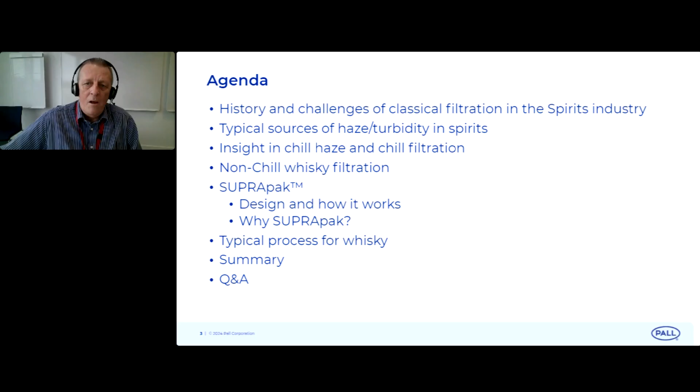First, I'd like to start off by asking just some polling questions, just so I can get a bit of an idea in my mind, with non-chill filtration. So this is filtration, for those of you not aware, is just standard filtration with no heat exchanger involved. So you are filtering at the ambient temperature of the room that you're in. If you could just please click on one of the answers, whether you're familiar, somewhat familiar, or if you're not familiar at all. Thank you.

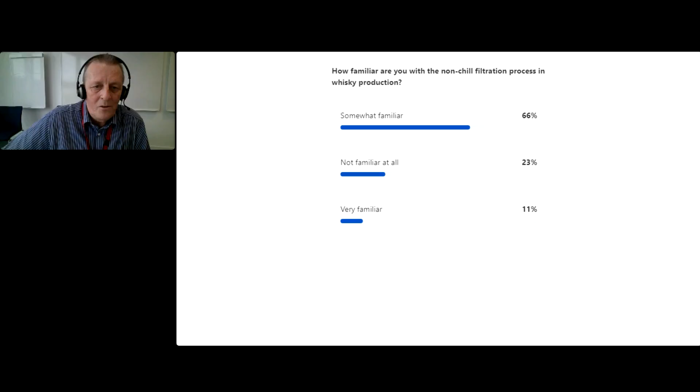And then I hope I've given enough time for everyone to answer there. But that's a fantastic response. It tells me exactly who it is that I'm talking to, and I appreciate your response.

So just to go over the history of spirits filtration, where we are - we go back as far as 1892 when we look at DE filtration, and this was traditional for really large batches. Then about 130 years ago, we moved on to what is now known today as filter sheet filtration. These filter sheets are still in existence today, and you're going to see how we've moved on from filter sheets already.

And then we moved on to lenticular filtration. In the Pall range, these are called the SUPRAdisc lenticular filters. It uses the same media as what you would use in a filter sheet, but you can use it for both large and small scale production.

I'm then going to introduce where we are now with the 4th generation, and that is called SUPRApak. SUPRApak is also sheet based, but it has a completely different filtration mechanism called edge flow, and that filtration, the SUPRApak range, is called modular filtration.

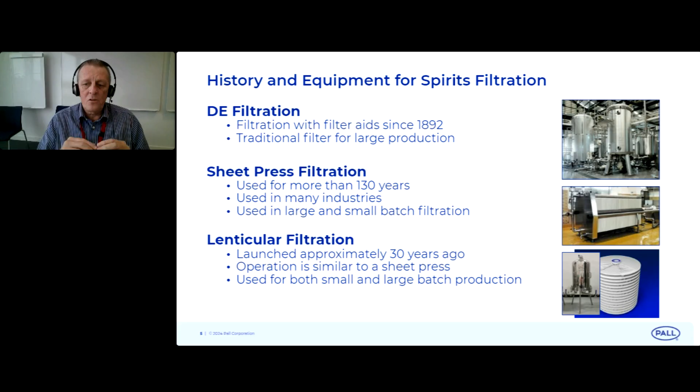So the challenges we're going to start with, because DE filtration doesn't exist, plate and frame filters do still exist. And what are the challenges that we're getting? Obviously, it's product loss. If we're talking about brown spirit filtration, you're talking about a very expensive product, so every liter of spirit that is lost in this process is costing a lot of money.

These filter presses, as you can see in the pictures, there's a lot of components to them, and these are high maintenance costs. These are old machinery, and also there's the labor cost involved in the filter changeouts, closing the filter, getting it ready, prepared for a production run.

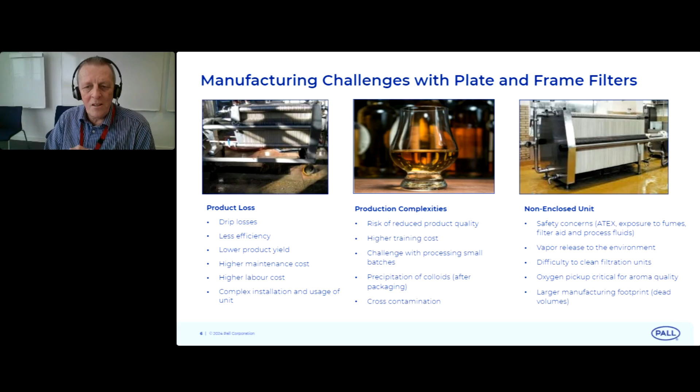Also there's a challenge with something like this. You're pretty much tied into large scale, or you're tied into small scale, one or the two. You really struggle to do both of these. With them not being fully enclosed, you've got the ATEX concerns, you've got the vapor releases into the environment, and you've also got these units can pick up, people will be walking past, touching them, and it's got a very large footprint.

So this is just a typical brown spirits process that I'm talking here, more or less, to the people who are not very familiar with the non-chill or even the chill filtered process. So of what you've got in...

processing brown spirits. The first part where Pall comes into the equation is when the casks or the tankers are unloaded into what's known as the dump trough or the disgorging trough, and these are usually then the pre-filters that are used before it goes through to blending.

Often we would recommend putting a filter before the heat exchanger, just so that no particles are going into the heat exchanger. Then you would have the typical filter press, lenticular, or the SUPRApak modular filters to remove the chill haze prior to bottling. You would have a guard filter as close as possible to the filling station.

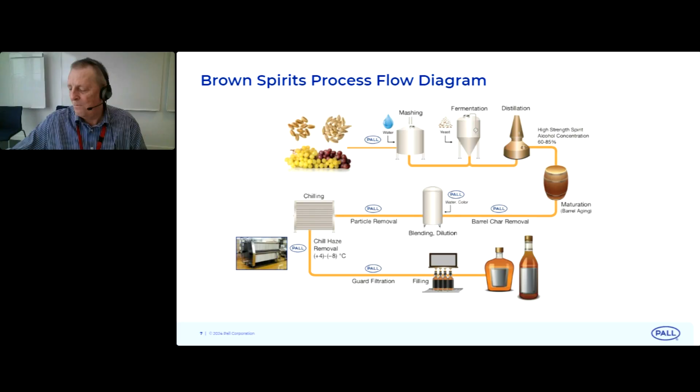We get haze in spirits, and what are the causes of haze? You will have particulate haze, and this is caused really by the mechanics of processing. It can also be caused by diluting with water. So there's quite a number of causes, you get your particulate hazes, and these can typically be quite easily removed with surface and depth filters.

So surface filtration would be your pre-filters, like a filter cartridge, around about, say, 40 microns. Some people go down to 10 microns. And you would also remove particles at the disgorging trough with a stainless steel mesh, 500 to 350 micron removal rating.

Then there's the colloidal haze. Now the colloidal haze, this is a lot of, from what we would say, the ingredients you would have from, say, citrus fruits. There would be parts left over from the previous distilling process, and these colloids are a lot more difficult to remove. You would remove these colloids with typical depth filter sheet media.

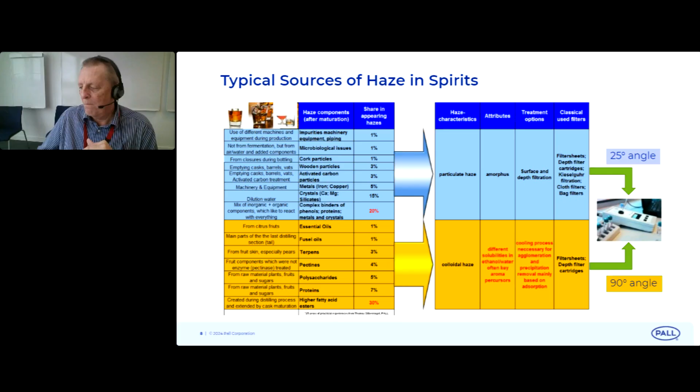Now the lipids, these are what creates chill haze. A typical example of what chill haze is: if you have a whiskey that has a number of lipids in it, just put a block of ice into a glass of whiskey and you will see that cloudiness form. So that is a very simple way of explaining what a lipid is.

And this affects, obviously, visually the spirit, which a lot of people don't like, but it also affects the aroma of the whiskey, and that is a problem, and it will affect the taste of the whiskey as well.

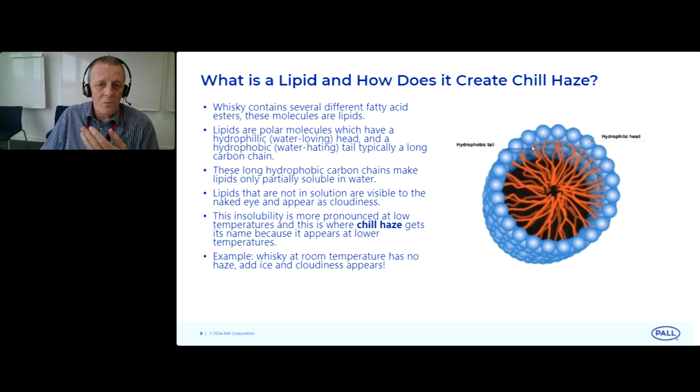Where do lipids come from? As you can see, a number of places. You'll get them right with the barley that's used, it will be during the fermentation, it will come during the distilling process, but also you're going to have the maturation process. As you can imagine, if you've got a very young whiskey, you shouldn't have that many lipids in there, and it should be a lot easier to process.

When you start going on to spirits which have been in the casks for a number of years, and also depending on the type of cask that's being used, a sherry cask for example, you will get a lot of lipids from that. But also, obviously, the longer that the spirit is maturing, the more chances the lipids have of growing as well.

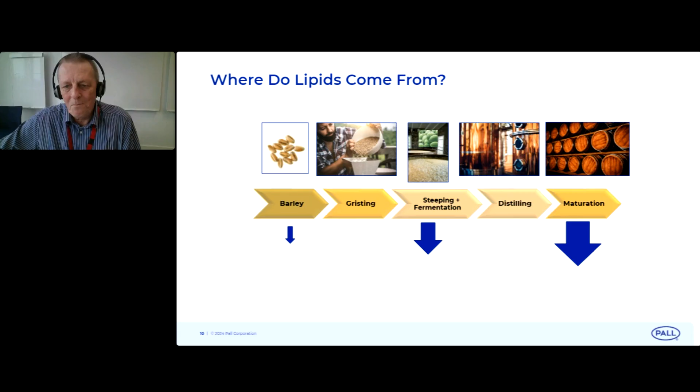Fatty acids, another term for lipids. We have good and bad ones. The good ones are the short chain fatty acids, the short chain esters, and those we want to keep in the spirit. Then you have the long chain fatty esters, which we want to try and get rid of. This is where the depth filter sheet media, the lenticular filters, the SUPRApak media, and modular filtration are geared. The specific type of media you use is to remove the long chain fatty esters and give you the optimal product.

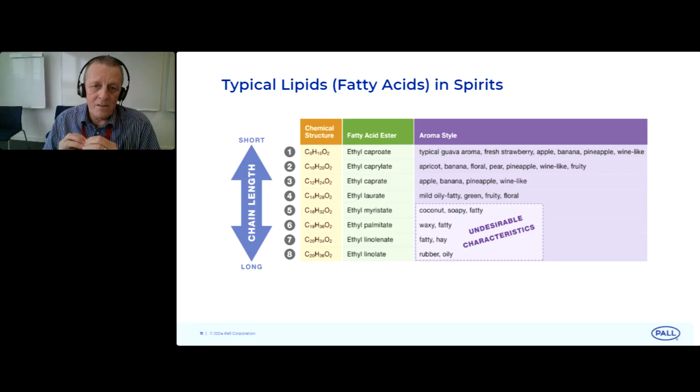Here's an example of the character of the fatty acid esters. The larger and longer they are, the more chill haze will be present, and more undesirable aromas will be present. When you go down to the short chain fatty esters, you're going to have a much lower chill haze, preferably none, and you'll have the desirable aromas you're looking for.

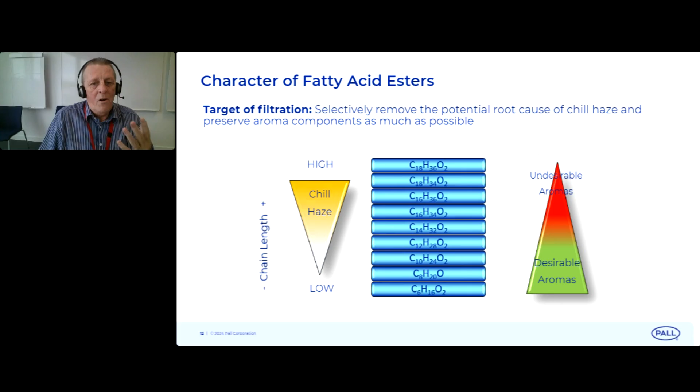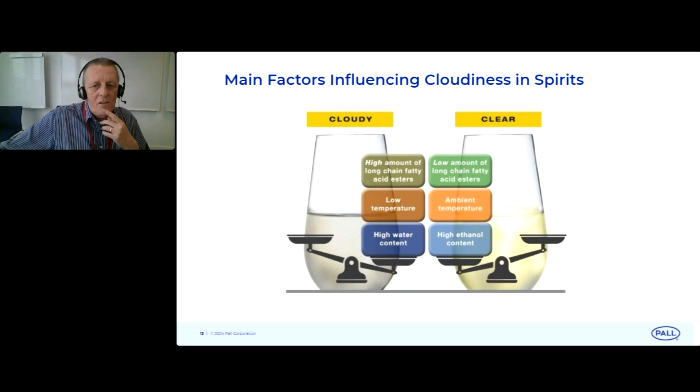What is best for adsorption is SUPRApak. We don't want SUPRApak doing any particle removal, that's for the cartridge filters upstream to take out all the particles. We want SUPRApak to only be adsorbing, using its entire surface area. This is how you get a larger surface area with SUPRApak compared to filter sheets, and you get a better absorptive effect.

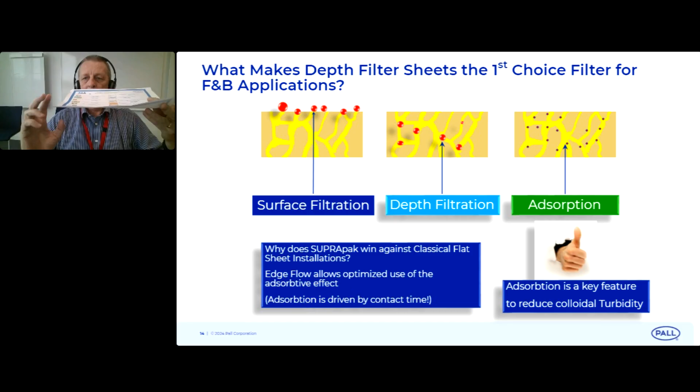This is used in what I'll explain as the edge flow effect. Just to give an example, I've got this piece of paper here. If you imagine that's a filter sheet, a typical filter sheet, and your flow is through this, that edge there of a filter sheet will be the size of your surface area. Now if you turn this filter sheet on its side, which is what we've done with SUPRApak, and the flow is still that way, now instead of that being your surface area, that is now the larger surface area. That's edge flow explained very simply, and you can understand why it has much better adsorptive effects.

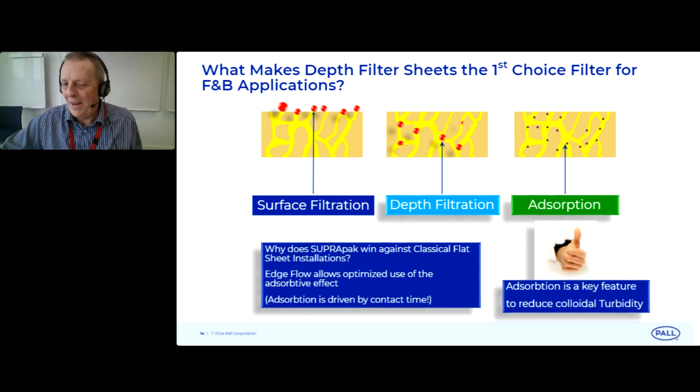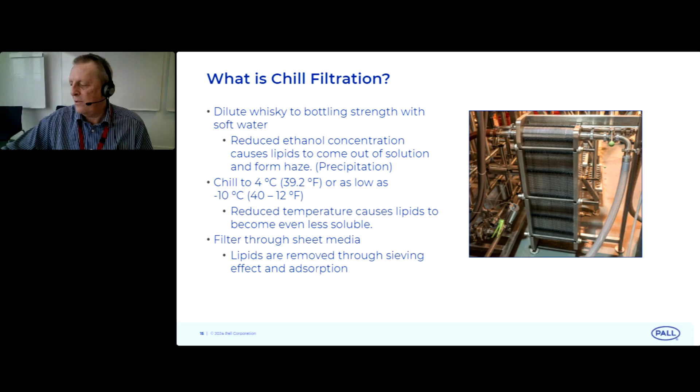Non-chill filtration has been around for, I guess, as long as chill filtration has, but over the past number of years we've seen a boom in non-chill filtration. The drivers, from conversations I've had in the industry, are really a marketing point of view. Whiskey producers are trying to get as original a taste as possible, original flavor and aroma, as close as possible to what's in the cask. By doing the non-chill filter process, you're able to get that, you're removing less, stripping less color, less aromas, less flavor.

How do you do it? You simply remove the heat exchanger, that's the easy way of saying it, but that is what it is. So what drives it? From what I've seen and speaking to colleagues, we see a lot of smaller distilleries, when starting out, going towards the non-chill method. That could be for a number of reasons: they may have chosen that route from a marketing perspective, branding the bottle as non-chill filtered, so the consumer knows they're getting a product as close to the cask as possible. Or it could be for capital expenditure reasons, since it's a very expensive component.

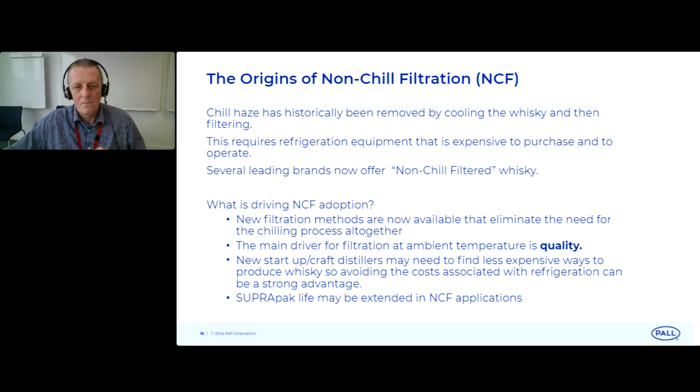So if you indulge me one more time, please. With your customers here, that's actually more of a question for me. But to yourself, I will leave out the with your customers part. Do you see the trends towards non-chill filtration in the whiskey industry? Do you see an increasing demand? Do you see it staying the same as what it currently is? Or are you seeing the demand for non-chill filters declining? If you could please just click on the screen, I'd greatly appreciate it. So I'm giving 20 seconds for each one of these.

Okay, so it's kind of what I thought from my own perspective. I would have expected to see the increasing demand a bit higher. Again, I thought that the stability would be round about that. But thank you so much for answering that. It's greatly appreciated.

So this is a filtered whiskey example. It's just an example of a site of mine where their target is a turbidity of no more than 2 NTU. They're currently using depth filter sheets. I just wanted to show people who are not familiar what a whiskey process looks like. So from the barrel to the dump trough, this particular site has a 500 micron mesh. They use bag filters before going down to the heat exchanger and the whiskey holding vat. That's to try and remove as many particles as possible.

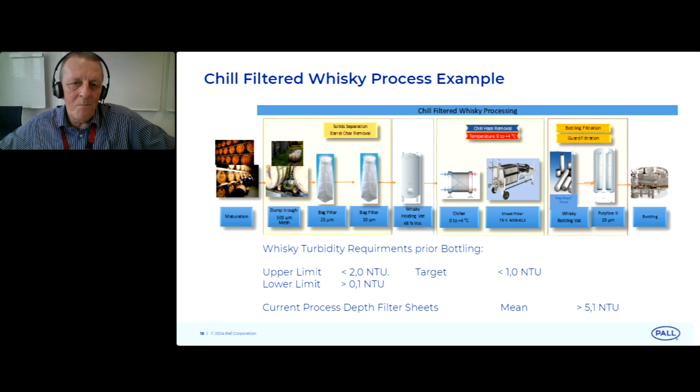And then looking at the results here, we've got the turbidity readings that we take. So when we do these trials, we always try and get the readings of the tank, this is a tanker offloading, or the tank after the barrels have been disgorged. We try and get a reading on what the turbidity is, because we know that we're targeting no more than 2 NTU. And then we've got after the water's added, and then the bottling vat sample. That's what will be going into the bottle. So with the process in the picture you've just seen, these were the turbidity readings that were taken.

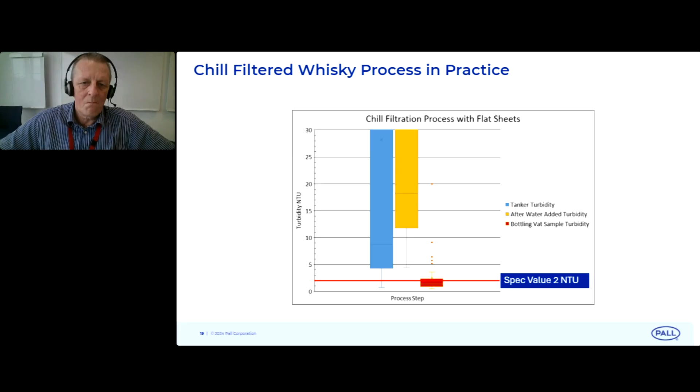And again, sorry, I think this is the last one. One thing that I'd like to know from you all is, do you often receive claims from your customers about the turbidity of the bottles that they've purchased? Seeing chill haze in the bottle, or haze forming particles in the bottle. Do you often get that? And is it a concern as well? You obviously don't want that. If you could just take 20 seconds to answer for me there, please. Thank you. Yep. Thank you so much. I really do appreciate that feedback.

So non-chill filtered, and again, I've taken a site, and if you can think back now to the filter press. So now we're onto non-chill filtered whiskey with the SUPRApak modules, and for the first time, the SUPRApak housing makes its appearance. As you can see, the maturation and the dump trough is the same. This is a site that's used a stainless steel 50 micron. And they've gone down to 40 micron cartridges and 2 micron cartridges. This is non-chill filtered.

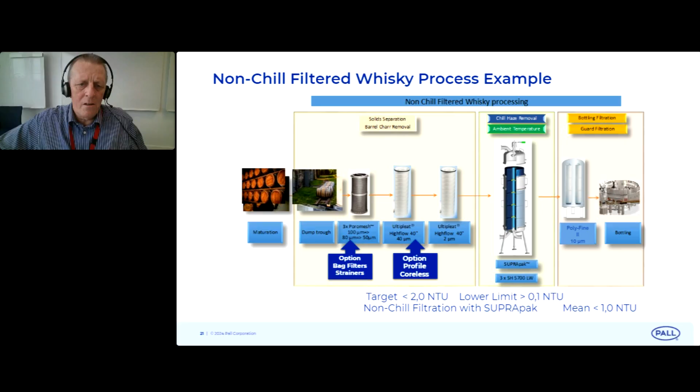And then you can see the difference. So the tanker turbidity after adding the water, and then you can just look at that bottling sample that we got there. We were given a not to exceed 2 NTU, and I don't even think that we exceeded 1 NTU. So we felt very safe after doing this.

And this particular site, when they compared their chill and non-chill, actually told me that these were the best quality analysis results that they'd ever received. Happy to say this was 2 or 3 years ago, and they still keep that process in place, and they're still getting the exact same results.

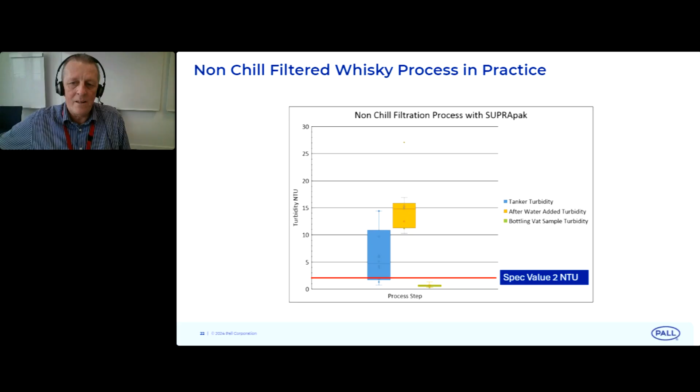What I spoke about earlier, so chill versus non-chill. So now we're talking specifically SUPRApak. So again, this is a site where the 2 NTU determines the change out. As soon as you reach that target, you change out the SUPRApak modules. And I believe this was set at no more than 4 degrees Celsius when they did the chill filter.

The 6 modules that were in place managed to do 40,000 liters each. As I said earlier, that's above average, even for a filter that's being chilled. That's good throughput, but they've also got extremely good pre-filtration. And you could see that they did 240,000 liters. I think they were running at roundabout 15,000 liters per hour.

They then did another batch of non-chill, and there actually were a number of batches. They ran these two side by side, and they also used 6 modules. They were getting 83,000 liters per module using non-chill filtration. If memory serves me correctly, it would have been between 12 and 15 degrees ambient temperature, maybe lower, depending on the time of the day. But I think the maximum the temperature hit that day was no more than 15 degrees.

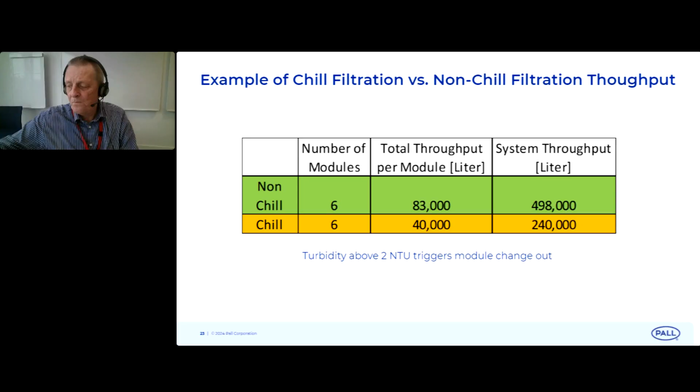So what are the conditions? Well, we say the SUPRApak is most effective when the spirit is older than 2 years. It's the ethanol content. We need to adjust it to about 43%. We do find with anything a bit higher, we don't always fail, but we're very secure when we're at 43%. Ambient temperature is below 20 degrees centigrade.

When we first started doing the trials with non-chill filtration and SUPRApak, we actually picked summer in Scotland, and while that might bring a smile to some of your faces, this was a hot summer, and we had average temperatures of 24 degrees centigrade. So we tried to pick the worst conditions. We still do that to this day. It's easy to do non-chill filtration in winter in most parts of the world, so if you can be successful in the summer, you can be confident you'll be able to do it in the winter.

With the SUPRApak module, we try and keep it with spirits at 3,500 liters per hour per module. So with 2 modules, you can move up to 7,000 liters. It all depends on your batch. And with all filtration, but mainly with non-chill and SUPRApak filtration, we really try and get the best pre-filtration possible. We're trying to have no barrel char particles or any other particles hitting the surface of what is an adsorptive material.

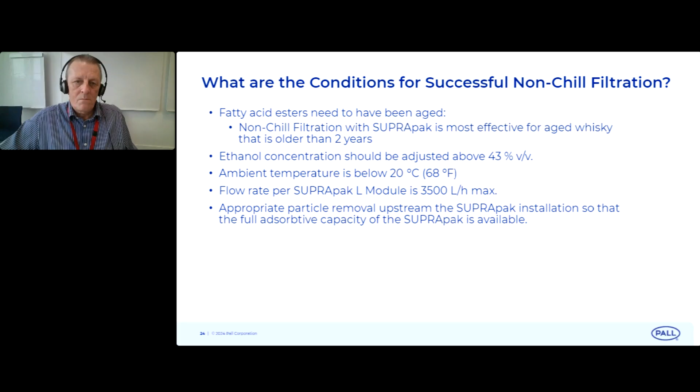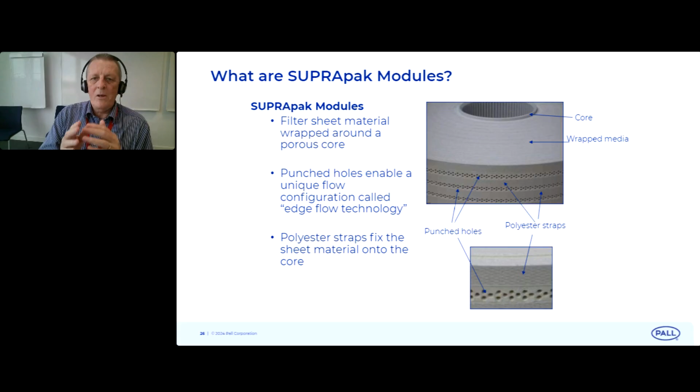Now, these holes are what creates the edge flow technology, because the spirit does not just travel in a straight line through to that plastic inner core, but it actually goes around the filter until it reaches the plastic inner core, because these holes do not line up directly, as I'm about to show you.

So that is how a filter sheet, if again, I'm just going to use a filter sheet, you'll probably have it, that will be your effective filter area, where I'm circling my finger there. And this outside here will not be used at all. So a lot of wasted filter area.

With the SUPRApak module, you're using every single part of the surface area of the module. You're also getting a much larger surface area, and at the end of this, it's so much stronger that you can blow through with gas, air, to try and get as much of the spirit out of the SUPRApak module, so you're having no spirit loss. So no drip loss, and lower hold-up volumes as well.

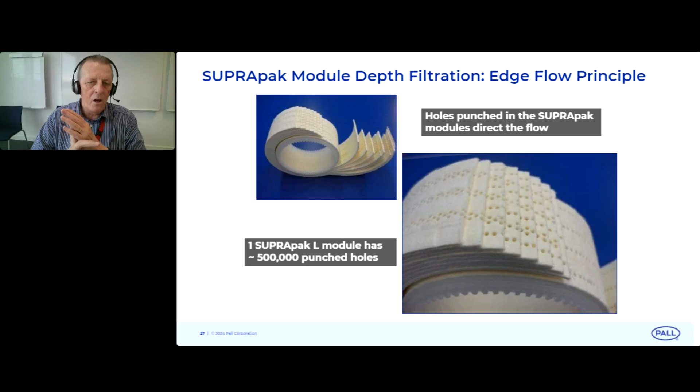Again, that's just an example, if you're still trying to work out how the SUPRApak works. It's filter sheet media. It's been punched through with holes, and as you can see, these holes do not line up. So it travels through the first layers of the SUPRApak media and then starts spreading around the module using every single part of the surface area.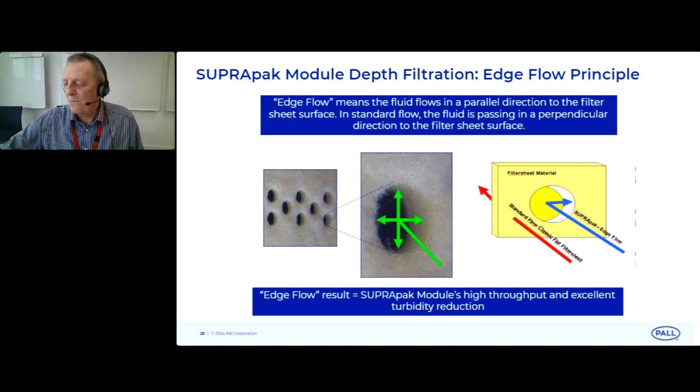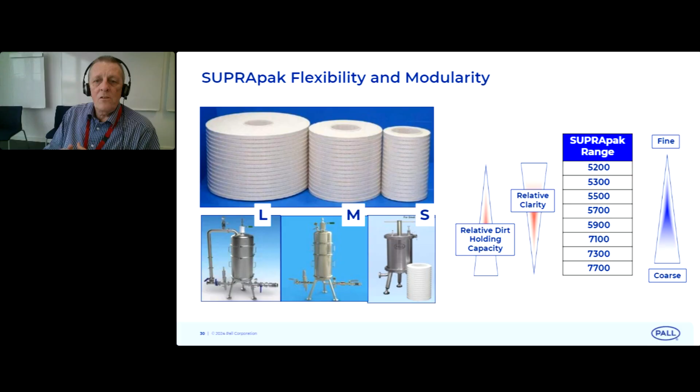There are sites that do two-stage filtration, especially if we're up in the very high volumes, that would use a 5.9 in the housing and then another housing downstream with a 5.7 involved. Again, this is for the very difficult spirits with very high starting turbidities that are being processed. So that's a two-step filtration.

And this is the last question from me. In your process, whether you have filter sheets or lenticular or the SUPRApak, how high do you rank flexibility? So being able to move, say, on one line from high volume to low volume on the same line. So if you had something like a SUPRApak housing where you could do it on one line and go from a 4 high, and then tomorrow you've got low volume, high value products to produce, how important would it be for you to have that flexibility?

Wow, thank you so much for that. It is a response that I was, I would say the word is, hoping for, but thank you so much. That's a really excellent response. I greatly appreciate that. To the best of my knowledge, that is the last question I'm going to be asking.

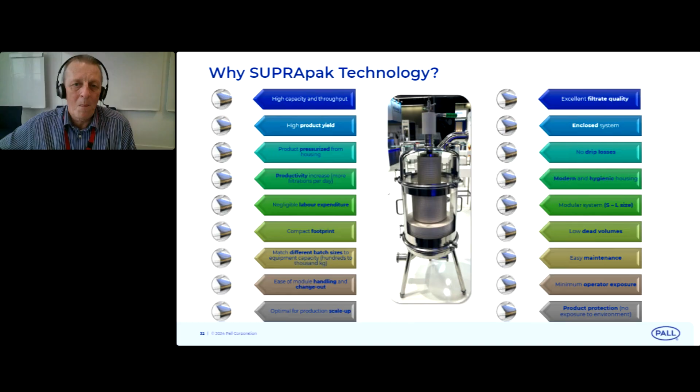Now, the last time that I did this presentation a number of years ago, SUPRApak had reached sort of its peak in terms of its technical features. Since then, we have introduced a new type of media. This is ZD media, or as my American colleagues like to keep pointing out to me, ZD media. It's a pure cellulose media. There's no diatomaceous earth. So you've got the same SUPRApak module, but just with a different grade of sheet.

So I showed you the different grades that we had before. And now this is the ZD media sheet. It has far less impact on color and flavor stripping. There's reduced water consumption. It's easier to dispose of, and you're getting a much longer service life out of this. So this is the new module that's come in, and we're seeing it especially if someone is doing non-chill filtration. With this media, we're getting even less stripping of color and aromas.

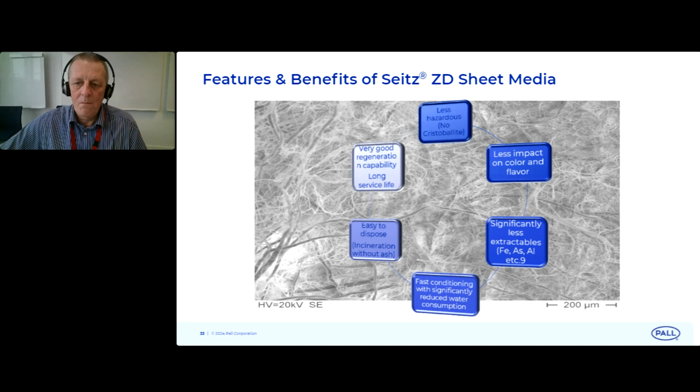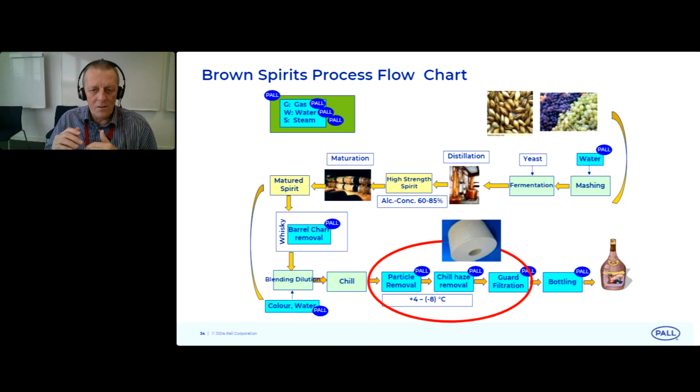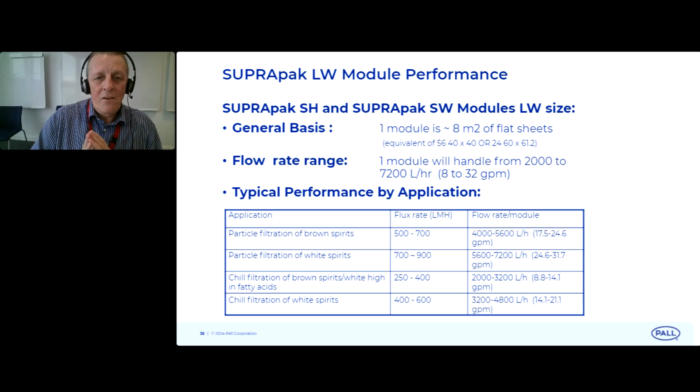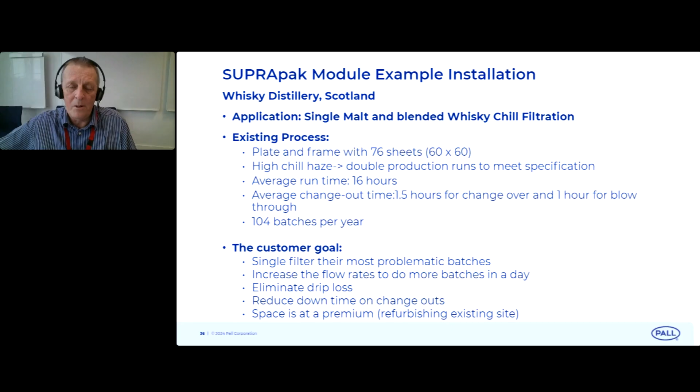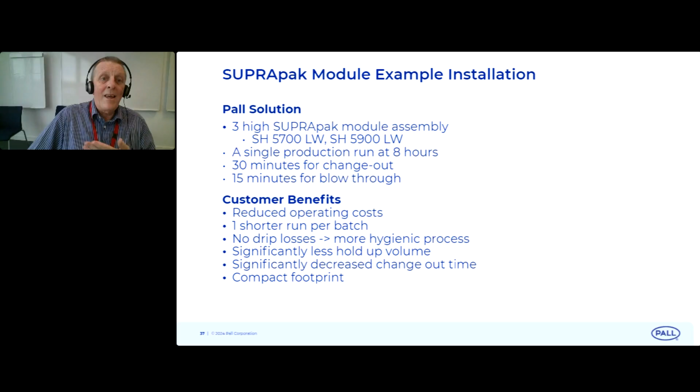Because of the size of the batches, we used a 3 high, and in the first production run, we did 8 hours, and we were within the turbidity specification, the color specification, the flavor specification. We met all of the criteria. We then blew through for 15 minutes afterwards to get as much as we can of the whiskey out of the housing so that this was going through to bottling. And there are the benefits to the customer. We'd reduced their production time by half, and they were getting a better throughput with no drip losses, no hold up, and we'd reduced their operating costs as well.

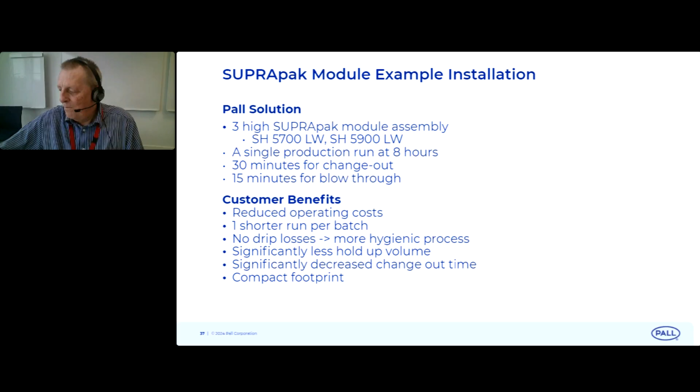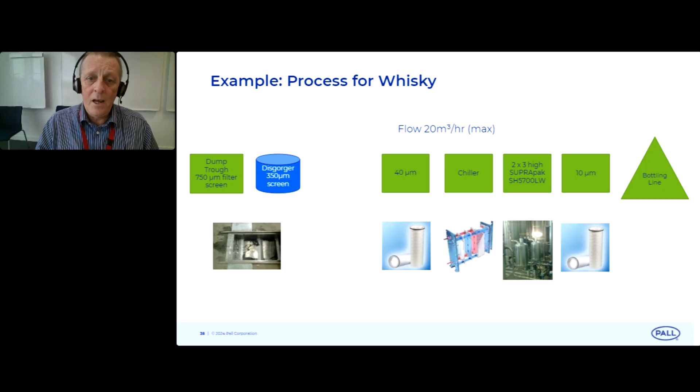I'm going to leave you now with just this last one. So I spoke about 2-step filtration. So if you go to the left, you've got your barrel, your disgorging barrel, and then you go down to your cartridge filters before a heat exchanger. And these were the 2 3 high SUPRApaks that were in play at the time. And then you would have a 10 micron filter cartridge prior to the bottling line. Again, if you wanted to do a non-chill filtration process with these, you don't have to change the grade of the modules. All you have to do is either switch off or remove the heat exchanger.